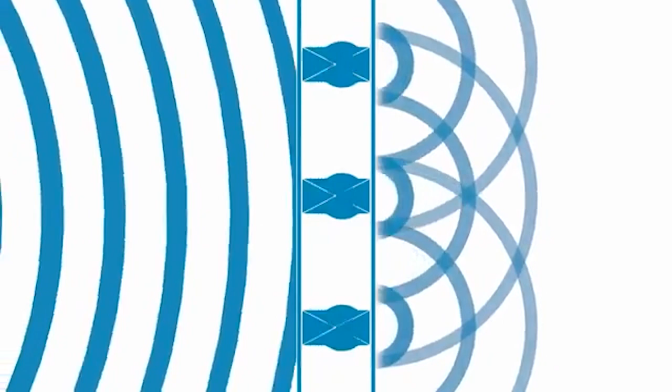When these waves strike the walls, roof or floors of a building, they are converted into vibrations in the structure, which then transfers the sound around the building. This sound is then re-emitted by other surfaces, in the same way as a speaker generates sounds. Airborne sound can come from outside the building as well as within, and typically travels in all directions throughout the structure. Building regulations therefore require most building elements to have some degree of airborne sound resistance built in.

Impact sound. Impact sound occurs when mechanical impacts cause vibration in the structure directly rather than via an external sound wave. Impact sound comes primarily from footsteps, and it is here that bare floorboards or laminate flooring cause problems, as carpet and underlay contribute a lot to reducing these impacts.

As with airborne sound, these vibrations pass throughout the structure before being re-emitted in other areas. Unlike airborne sound though, the regulations regarding impact sound are typically only concerned with sound transmission between the floors of a building.

Acoustic properties. We'll now take a look at some of the properties of walls and floors that can affect the sound transmission within buildings. A thorough understanding of these factors is important when designing structures to perform well acoustically.

Mass. When considering acoustics, the mass of a wall or floor is a very important factor. The heavier the element is, the harder it is for incoming sound to induce any vibrations. This has the effect of reflecting a greater proportion of the incident sound waves, resulting in less sound being transferred into the structure. Heavy elements such as brick walls or concrete floor slabs are therefore better able to restrict the passage of sound, particularly those problematic low frequencies, than lighter timber frame structures.

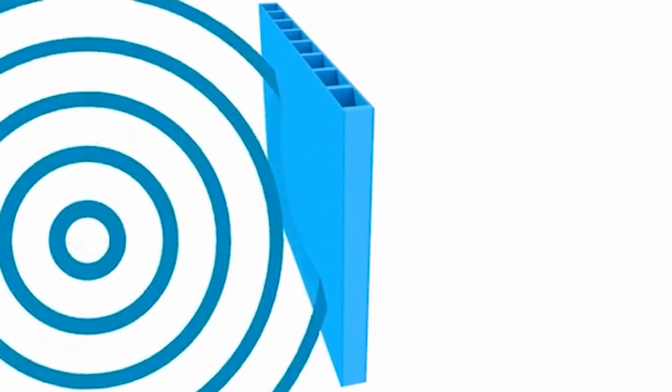It is, however, not always practical or economically viable to use high mass constructions. This is particularly true in refurbishment projects, where increasing the mass is often impossible.

Stiffness. The stiffness of the structure is important as it dictates the ability of the structure to vibrate. While the mass of an element restricts the absorption of sound waves, the stiffness restricts their transfer once absorbed.

The property governing this is the modulus of the element, in other words, the ratio of depth to width. A shallow and wide beam will vibrate more than a deep and narrow one, allowing for a greater amplitude of vibration and therefore more sound to be transferred.

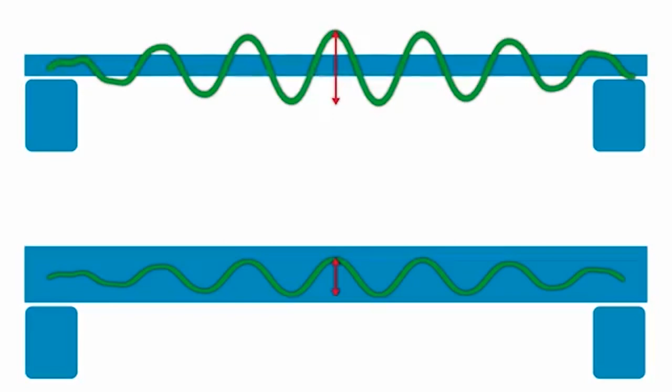A related property here is resonance. Every part of the structure will have a frequency at which it vibrates more readily. This is the natural or resonant frequency. If the natural frequency of, for example, a wall, coincides with a frequency in the incident sound, the effect may be to amplify rather than reduce the sound. Careful consideration of the stiffness and frequency response is therefore necessary to avoid this.

An effective way to prevent sound transmission through structures is by physically isolating one side from the other. This can be achieved either by using entirely separate structural elements, such as independent floor and ceiling joists, or by using resilient mountings for floor and ceiling surfaces.

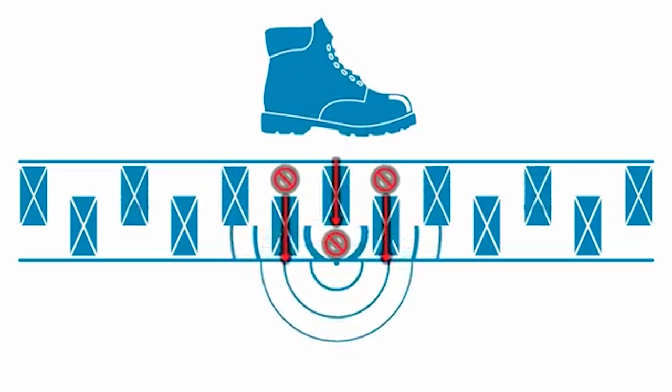This approach aims to break the pathway for sound to travel through the structure from one side to the other. With independent structures, there is an actual discontinuity in the pathway, leading to the best acoustic performance. However, this approach results in very thick wall or floor elements, so it is not always practical, and as such tends to be used only when acoustic performance is the primary concern, such as in recording studios.

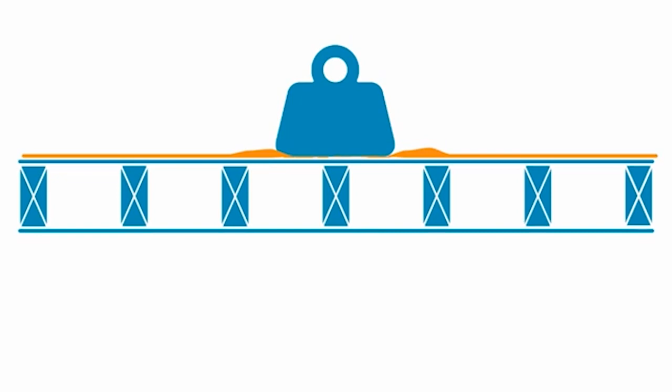Resilient layers are usually a cheaper, thinner and lighter weight solution. They can be applied in the form of floor deck or batten systems, as ceiling mounting bars, or commonly both. These work similarly to car suspension by damping the vibrations and reducing the energy from sound waves by allowing a degree of movement. These systems must be carefully matched to the loadings expected on floors, as heavy weights can damage the layer and reduce their effectiveness.

Absorbency. Absorbent acoustic materials work by reducing the echoes within cavities in a wall or floor construction. This has the effect of breaking up the sound waves in these spaces. It reduces the overall energy transfer by converting the energy in the sound waves into heat due to friction between adjacent fibres. Fibrous material, such as mineral or polyester quilts, are usually used for this purpose, most commonly in timber or steel-framed structures. If there are voids present, partially filling them with an absorbent material will generally help reduce the sound transfer.

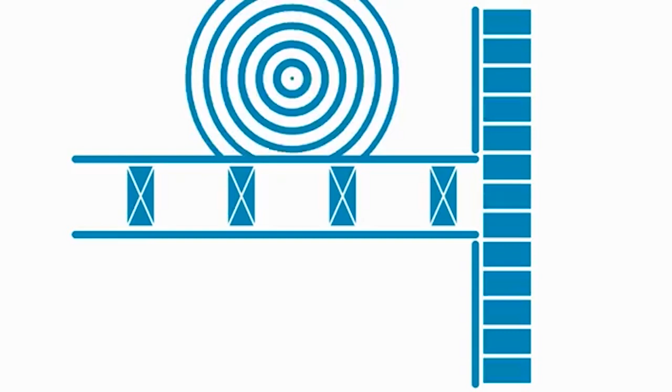Flanking transmission occurs when sound can pass around the sides of an element, for example, bypassing a floor construction by going through the walls instead. This can result in elements with well-designed and specified acoustic insulation failing to perform as well as intended.

Flanking transmission can be minimised by paying attention to how linkages between floors and supporting walls are designed. However, outside of new build constructions, this can be difficult to achieve. It is therefore not uncommon in refurbishment projects to over-specify the acoustic insulation to account for the unknown quantity of flanking transmission. Acoustic floating floor systems will typically use a strip of foam at all perimeters to prevent physical contact between the walked-on surface and the surrounding structure.

Building regulations. The building regulations for acoustics have remained relatively stable since the mid-2000s. The precise details vary across the UK, with slightly different variations used in England, Wales, Scotland and Northern Ireland, but there is a lot in common, which we will consider here. The regulations set requirements for impact and/or airborne sound transmission across separating walls between adjacent properties, and for airborne sound only within a single dwelling.

Between dwellings, floors are required to resist both impact and airborne sound, and walls to restrict only airborne sound. Between dwellings and commercial properties, such as shops or offices, only airborne sound insulation is required. Where a roof terrace or balcony is over a dwelling, impact sound insulation is required.

These requirements are expressed by way of a single figure value, which combines the sound levels across the full spectrum of frequencies into a single number. Depending on the regional variations across the UK, this can be weighted to emphasise different frequencies or make the requirement more or less stringent. In general, though, acoustic requirements are expressed in terms of decibels, dB, of reduction in sound pressure. For airborne sound, this is expressed as dB DnT,w, with a higher single figure value indicating better acoustic performance. For impact sound, dB L'nT,w is used, with a lower number indicating better performance.

The requirements are reduced slightly for refurbishment and conversion projects to reflect the practicalities of introducing acoustic insulation into existing structure. This can include period features that are listed, or unknown existing details or defects that cannot be easily remedied.

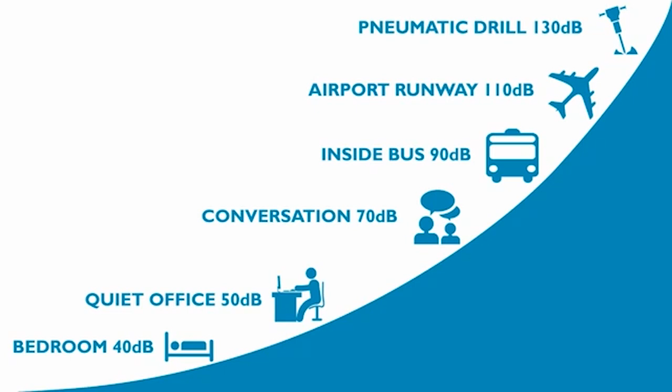These single figure values do not vary linearly with perceived loudness. A change of 10 decibels in the acoustic performance equates to a doubling or halving of the perceived loudness. This makes the scale used very sensitive, but also makes it very difficult for the human ear to detect subtle variations in acoustic performance.

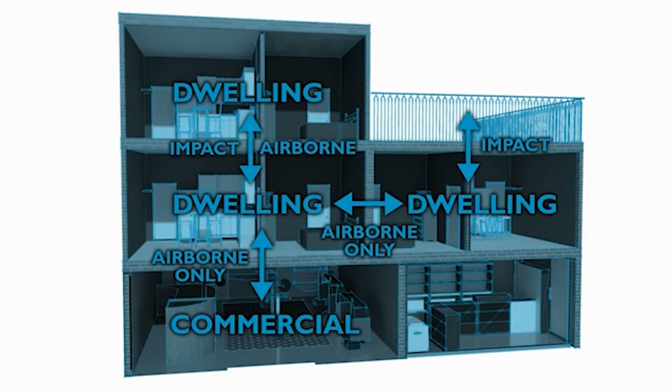Testing and compliance. Because of the difficulty in accurate perception by the human ear, an important aspect of the regulations is a mechanism to ensure compliance. Again, the specifics of this differ between the various parts of the UK, but pre-completion testing of at least some portion of separating walls and floors features across the country. Acoustic testing is a complex process and should only be undertaken by those appropriately accredited by organisations such as the United Kingdom Accreditation Service, UKAS, or registered with the Association of Noise Consultants.

Testing for airborne sound is typically done by using an omnidirectional speaker to play a predefined pattern of noise, which can be measured by sensitive microphones and sound meters in adjacent rooms. The figure quoted is the difference in sound levels across the partition, so the higher the figure the better. The sound source used is usually pink noise, which has equal power per octave, giving more weight to low frequencies than white noise, which more evenly distributes sound power. This shift in frequency is quite noticeable when the two colours of noise are played back to back.

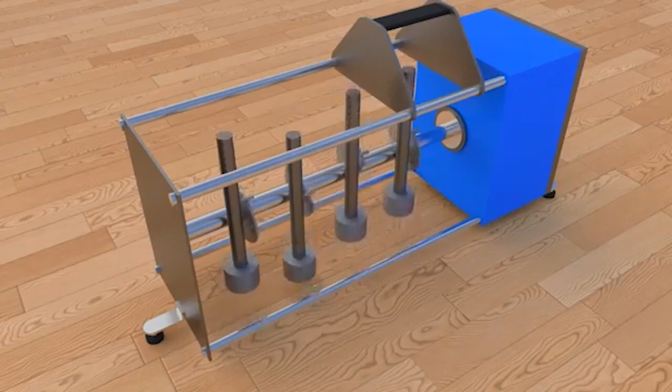Impact sound is measured using a tapping machine to simulate footfall. Tapping machines use a camshaft to drop carefully calibrated weights in a precisely defined rhythm. This sound is then measured in the room on the other side of the separating floor. In the case of impact sound, only the level in the receiving room is measured, so a lower result indicates better performance, the opposite way round from airborne sound measurements.

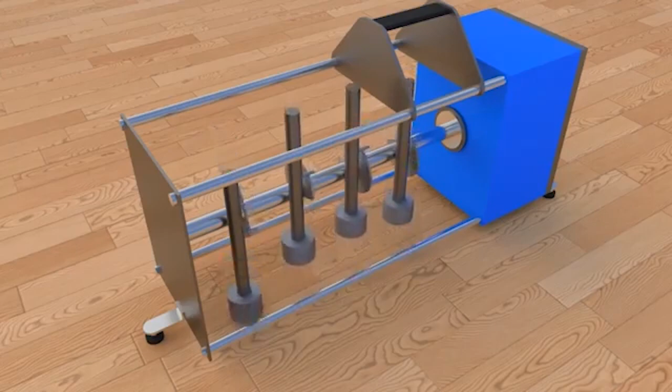The equipment used to measure this sound must be very sensitive, so during testing it is crucial that certain site conditions are met. The building under test should be more or less complete, with doors and windows in place. A lot of noise can transfer through openings, so it is also important that vents and ducts are also in place, or their openings sealed.

Site noise should also be minimised during testing. Ideally, testing should be undertaken at night when no work is being done on site and noise from machinery and traffic will be minimised. Any extra noise from site work will lead to poor results or possibly even test failures, so it is in everyone's best interests to ensure the correct procedure is followed.

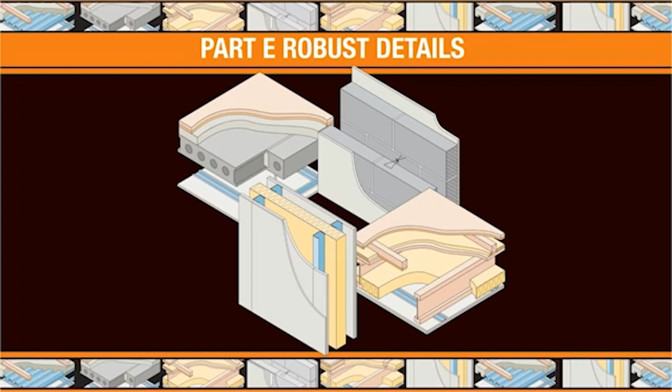As an alternative to testing, designers can use approved robust detail constructions to comply with building regulations. These are standardised subfloor types to which pre-approved floor and ceiling treatments can be applied. Because these construction types have been tested thoroughly ahead of time and have consistently exceeded the regulation requirements, they can be used without testing, provided they are followed to the letter.

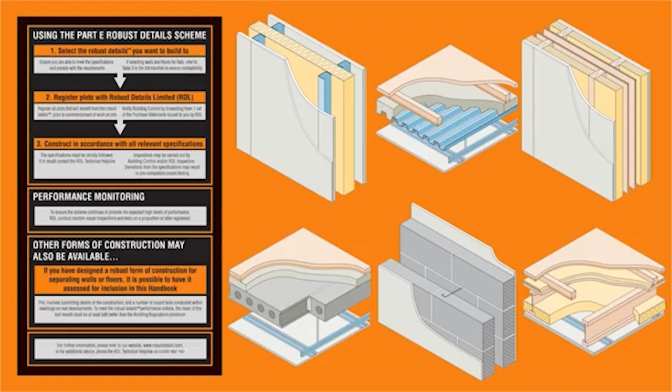The Proctor Group have floating floor treatments to suit most robust detail floor types, with a range of systems approved in floating floor treatment, FFT, categories 1, 2, 3 and 5. As well as floor type and acoustic treatments, robust detail also includes standard detail for the junctions and connections between walls and floors in order to minimise flanking transmission.

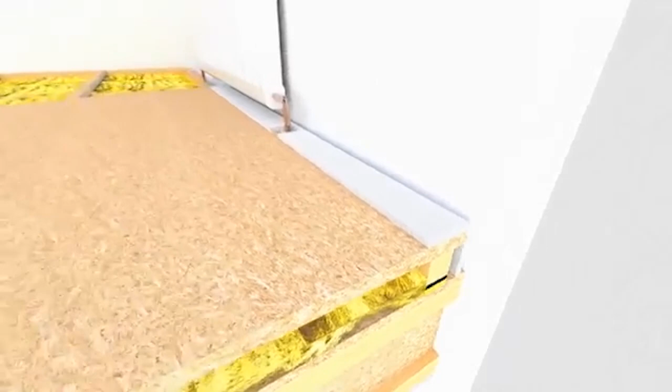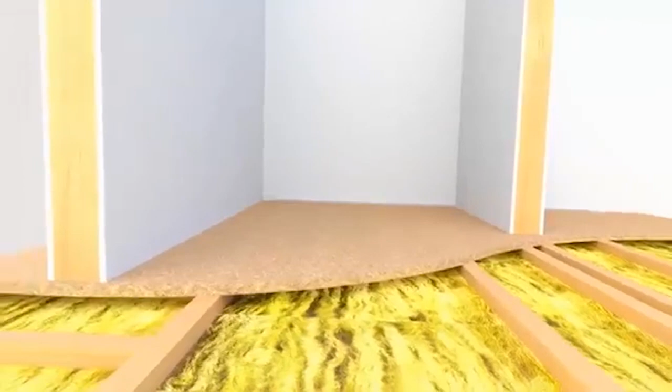Acoustic Floor Systems Overview. There are two principal types of acoustic flooring systems, and a few other less common ones. Batten systems. Batten systems, such as ProFloor dynamic battens, are most popular in new build timber frame floors, and are the top performing floating system. The extra depth introduced between the battens not only simplifies service runs within the floor, but also provides additional void space in which additional fibre layers can be added to boost sound absorbency.

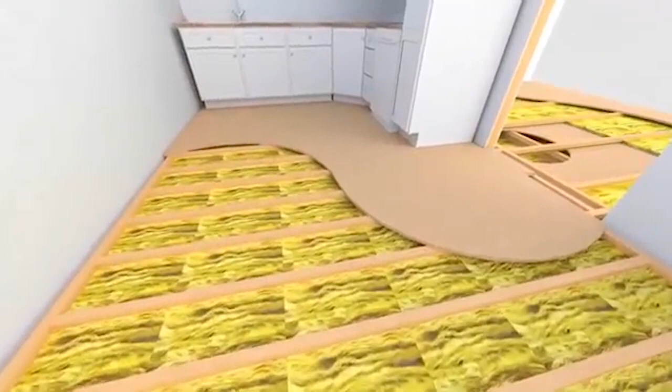The downside to batten systems is that they tend to be thicker, so it may not be practical to apply to all floors if tying into adjacent floor levels is an issue. The Proctor Group supply a range of batten systems to cover a variety of different project requirements and floor types.

Deck systems. Deck systems are much shallower and can provide a good boost to the impact sound performance of a floor. However, they offer little scope to improve the airborne performance. For that reason, they tend to be more commonly used on concrete floors, where the base floor mass does most of the work dealing with the airborne noise transfer.

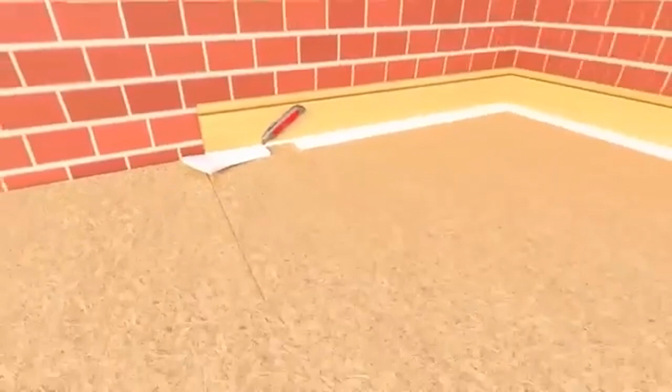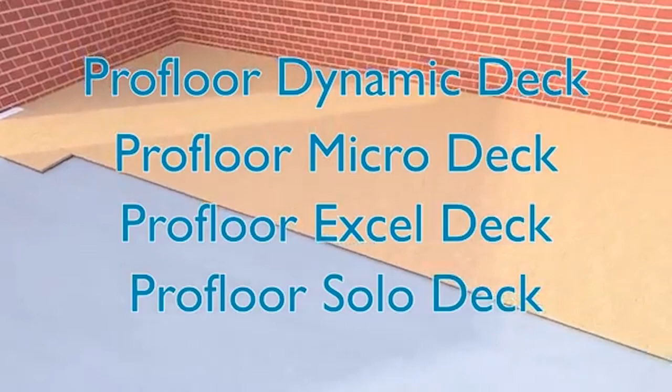Deck systems are also a good fit for refurbishment projects, where floor-to-ceiling height may limit the scope for using a batten system. Systems like the Profloor Micro Deck at only 17mm thick can improve impact performance noticeably while having minimal impact on floor levels, services and internal trim and skirting. The Proctor Group's range of overlay deck systems are designed to provide the optimum balance of performance and thickness, while accounting for the practicalities of working within existing properties which may not have ideal access.

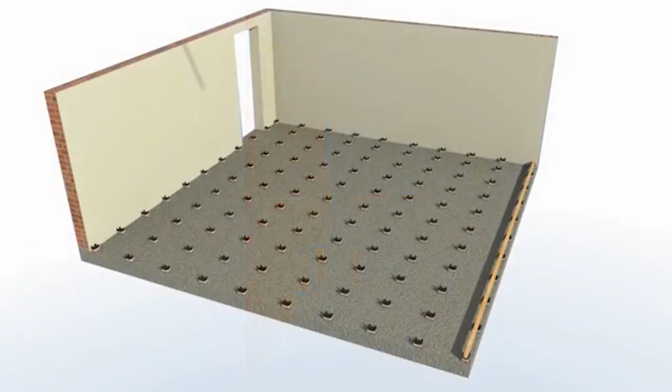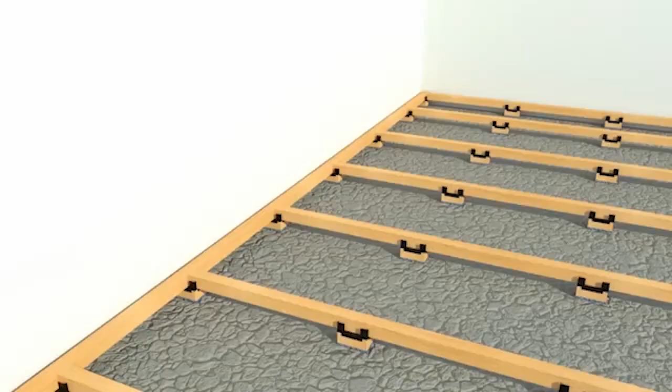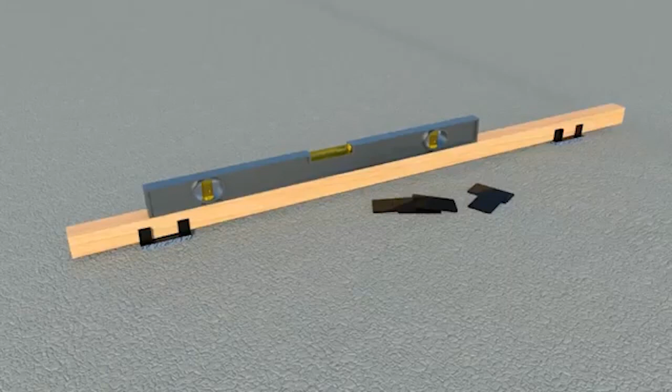Other systems. Of the less common systems, the levelling system allows a floor to be raised and levelled while introducing a degree of acoustic performance. This is useful in existing buildings where floors may be substantially off the level, or in new build where pre-stressed slabs may be used, which have an inbuilt camber that must be corrected to give a smooth, level finished floor. The Proctor Group's ProFloor levelling system uses specifically designed resilient bases with packing pieces to accommodate variations in finished floor level from 51 to 203mm, while still delivering good impact sound reduction.